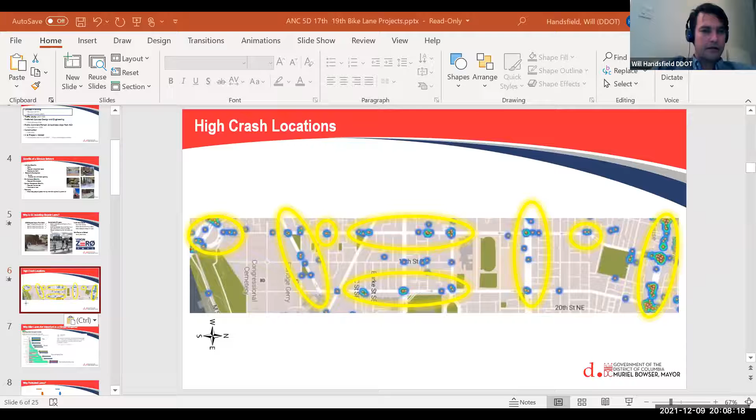Great. Yeah. And so many of you, I think I've crossed paths with some of you in the past, and I'm glad to see you all here. Give me a heads up if you want me to jump into my presentation. Sure. I think we should probably get started. I know a couple folks are running late, so I'll just let them in whenever they log on. And I'm trying to stay off video as much as possible because my connection's a little tentative right now. But yeah, whenever you're ready. Okay, I'll go ahead and share my screen. I probably won't be on the right starting slide, but we'll get back there in a hurry. Let's make it bigger. I think that's right.

And so, hi, I'm Will Handsfield. For those of you who don't know me, I'm a bike planner at DDOT, transportation planner more broadly, but bicycle program specialist. So through that, I'm one of two people chiefly responsible for putting together a connected, protected network of on-street bicycle facilities suitable for use by everyone, all ages and abilities, from pretty much 8 years old to 80 years old. That's really the big mission.

We're going to be talking about 17th and 19th, which are projects that are south of your SMDs or your full ANC, but obviously related. And I'll talk about another project that's in your SMD that's very directly related. I am not going to be the driver on that project, but my colleagues at Transportation Engineering and Signal Design are going to be doing it.

So we're looking at 17th and 19th, which are both corridors that have kind of the weakest form of bike infrastructure for most of it, the sharrow, the way they were used on those corridors. Very recently they were part of a capital project at DDOT. It really finished the planning phase in 2015. They were implemented in 2016 and 2017. And the promise to tame traffic has not been realized, let's put it mildly.

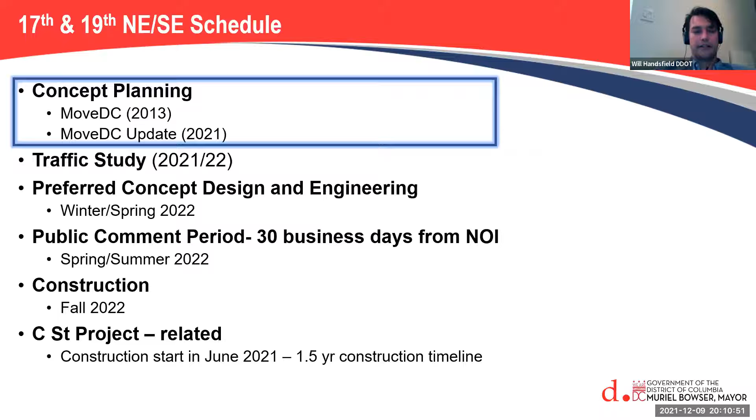We're trying to get to a construction date in fall 2022 so that we can have it done within about a year from now. And then, just related, the C Street project, C Street Northeast, is under construction now. It should also deliver about June 2022. In 2020, I have a little typo there.

So anyways, the bikeway network we're trying to do, there's a lot of benefits. I think this crowd is well aware of them, but let me just call out a few that may not be so obvious. Certainly for economic development, what I don't have on the slide, and probably should, is that local retail sales seem to actually be better in places that are bike and foot traffic accessible. There's certainly the CO2 emissions. One that's come up recently that's very interesting is resiliency.

My own story about how bikes are resilient is in the 2011 earthquake, when my very pregnant wife was in Foggy Bottom at work when they were evacuated from their building. Didn't go back inside. The metro started operating at like half speed, and then pretty soon the platforms were so crowded you couldn't even get down. The street network failed, and so all the lanes for every road were filled with cars, and none of them moved. It was complete gridlock.

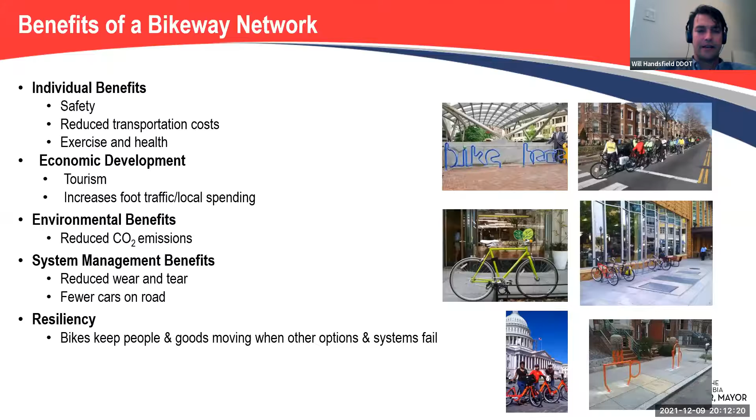And the way I got her out of downtown is I rode a Capital Bikeshare over, sat her on the bike share, and then walked home. It was about 7 miles, but she was able to roll. She was 8.5 months pregnant, and so was not really in a position to walk 7.5 miles. So that's an example, but for evacuations and other things, bike routes and bike lanes and trails especially are extremely good. Which I always like. I think that's sort of not too obvious to most.

We start with our 2005 bicycle master plan. We actually achieved all the goals in there. We got to, which is actually the hardest thing in my lifetime to change about the transportation network, something called mode share, which is what mode people are choosing. When I first started being interested in transportation planning in like 2003, 2004, I was in LA. And like nobody walks in LA. True, pretty much, right? And if you do, you're kind of treated like an alien species. But that's around what we had in LA at the same time. 1% of trips by bike, maybe generously.

Same in DC. DC has invested a great deal in bike infrastructure, and so by 2015, we actually had 5% of trips by bike, and now we're probably at like 7 or 8%. And there's some neighborhoods, so Capitol Hill and close-in ones like Trinidad are good examples. They're really high. They're like at 10%, 12%, 15%. Adams Morgan, Shaw.

We also have a bunch of goals from Sustainable DC. One that's really interesting is that 25% of all commuter trips should be walking and biking trips in the next 10 years. And we should actually reduce automobile trips. This is in writing, by the way. I didn't make this up. Reduce automobile trips from 43%, which is around what it is today, to 25% of all trips.

We also have the Vision Zero goals that say zero fatalities, right? No fatalities acceptable. We're going to do everything we can to get to zero. And then we have Safe Routes to School, which is the simple premise that children should be able to go on their own to school or with a parent and arrive safely.

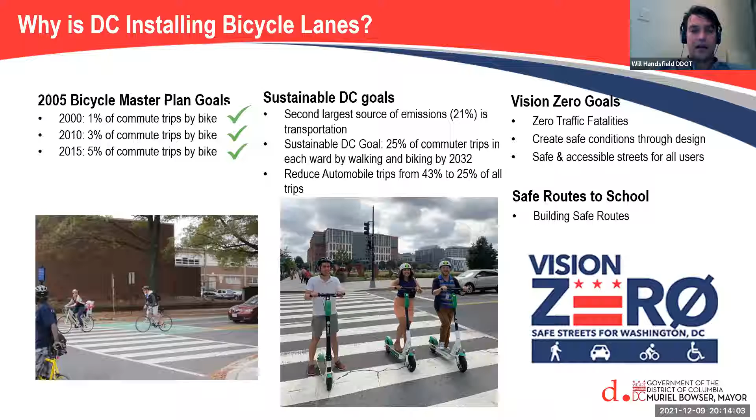I just want to show all the crashes in the 2 corridors we're talking about. So 19th. And just orientation-wise, north is to the right in this diagram. I have a legend there at the bottom, but just to fit it all in, we had to turn it sideways. So the right side is going to be Benning Road, and at the very bottom, you can see Barney Circle. And you just see these clusters of crashes.

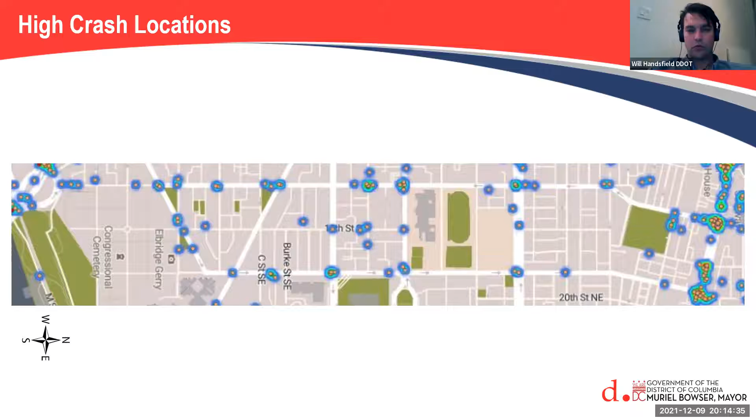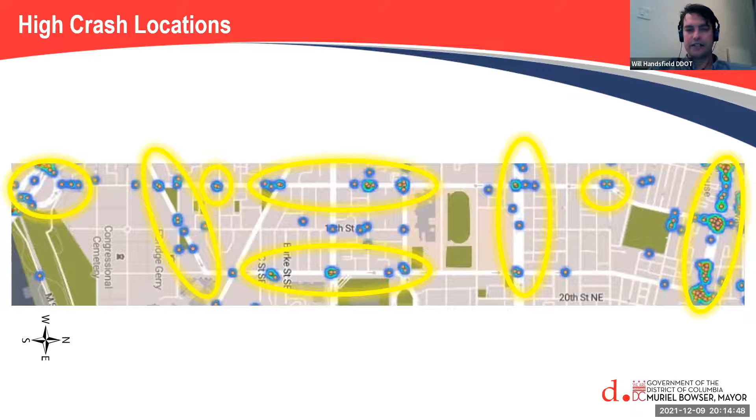That's a lot, right? And the reason that there are so many crashes is the road design. It's 2 lanes in each direction, one way. That pattern just generally is set up to have a lot of crashes. You can also see there's a huge cluster along Benning Road. So that's an area of future focus. It is one of the more principal arterials in the city.

Lots going on there. Bike lanes are an important climate response for anyone who's concerned with the issues of climate change. Down at the bottom of the chart, that's the CO2 impact of internal combustion cars. Just slightly above it is electric cars.

You can see it's a lot more in the manufacture and less in the operations, but it's not all that great, all told. Transit is excellent. It's down there towards the bottom of the chart, but at the very bottom is walking, and next to that is biking. Slightly above that is e-bike. You also have light rail, right? Electrified light rail, like the streetcar.

I think it's important to get this out there that what is scientifically necessary to do right now exceeds what is politically possible. And I'm trying to change that, along with many people at DDOT, so that we can put in the projects that will actually help us get to a low carbon future. And I'm under no illusion that just doing it in DC is enough, right? But DC is a leadership city, right?

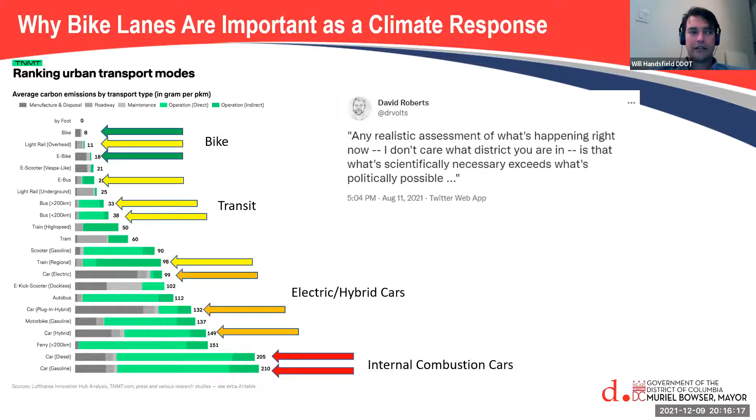We get millions and millions of visitors annually. And unlike European cities that we sometimes can point to, if they see it here, they go, well, DC did it, and maybe we can. And so we are leading the country. We're one of probably the top 3 to 5 cities always on any ranking of bicycle friendliness and bicycle accommodation, though I don't think we do enough, and I'd like to do it faster.

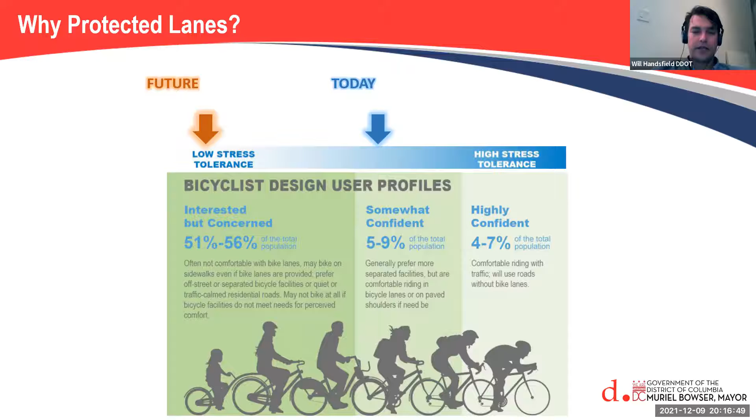Here's kind of where we are today. We used to be catering just to the person on the right, the fast, I'll ride in traffic type cyclists. I think we're pretty good generally for people who are more commuter oriented, but what we really want to plan for is that user group on the left. It's like mother and child, or somebody who's older, that if we plan around their stress tolerance and their needs, then we really cover everybody in our bicycle network. So that's really the design customer.

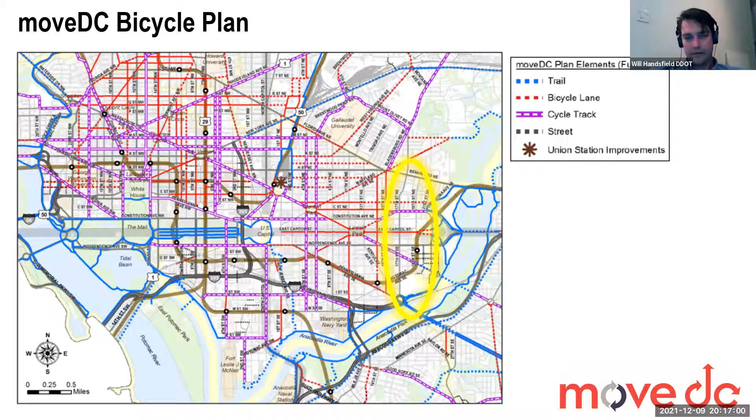Here's the 2 corridors. In the original Move DC from 2013 they weren't considered as very important, but we have a new version and both of those corridors are on it. And so we're going to be working to try to make them work. But also for 5D, you can see some of the other routes that we've got on there. So we have Maryland Avenue going all the way diagonal up to meet with M Street going east-west. We have Bladensburg, and we have 17th Street, and then 17th Street hooks around and becomes Mount Olivet. So all those corridors are envisioned as having some bike facilities on them.

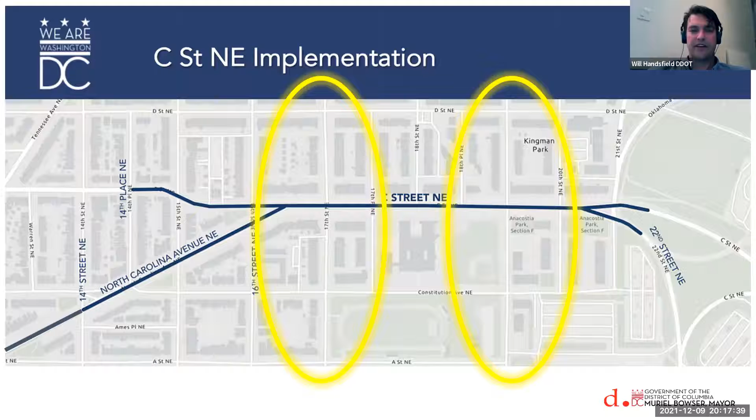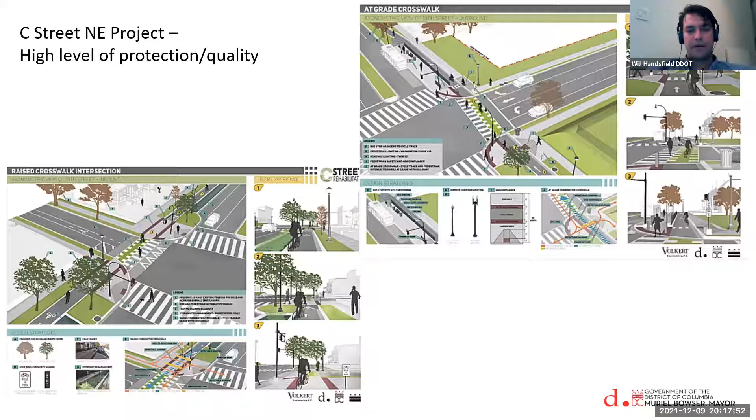There's a bunch of types we can talk about. Just for C Street, this is maybe not so relevant for 5D, but this is the intersecting street. And it has this really top level, best in class type infrastructure that they're adding to the corridor, right? So raised crossings all over the place, separated bike paths, a real game changer in terms of what we're actually building.

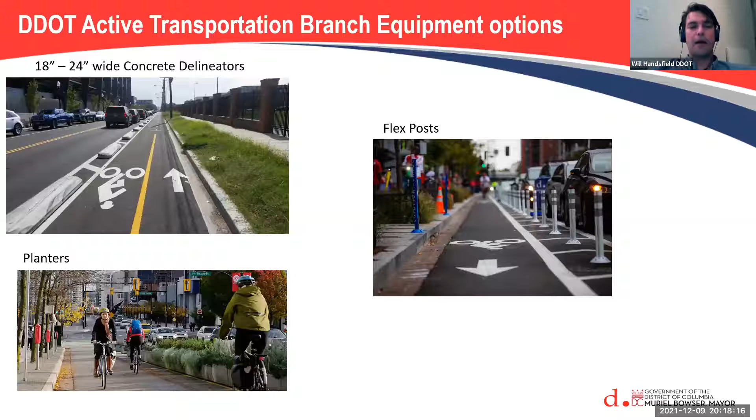This is the kind of stuff that I tend to work on, right? So within the existing curb to curb, we will use paint, really it's thermoplastic, but anyways, colored pavement markings and equipment to change how the road operates and who gets to use it safely.

There are a bunch of reasons why we're trying to change this particular corridor. A lot of the general thrust is we really need to get this network of bikeways in place so that we can meet that 2032 goal of replacing a lot of driving trips with bicycling trips. It's not going to happen if we don't provide safe places for people to ride their bikes. We get a lot of, actually it's not TSA, I think it's TSIs now, TSIs for the 17th and 19th corridors, a couple particular intersections where those high crash rates are.

There's an overall interest in diminishing the existing traffic dangers along those 2 corridors that result from that minor arterial condition. There are some new uses like the RFK fields that are proximate. There's the 2 schools, Eliot-Hine and Eastern, and I'm sure there's some students from your SMD that go there, and we would like to support them if they want to bicycle there by themselves.

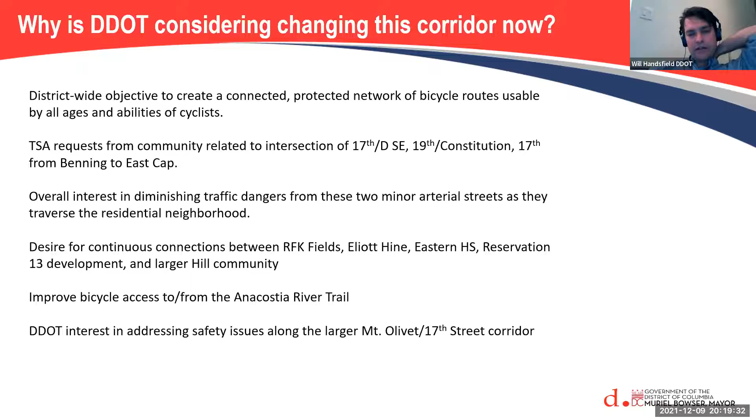There's also an important bike trail link to the Anacostia River Trail at Barney Circle, and our overall interest in addressing some of the safety issues along Mount Olivet and 17th, which will come later. But this is the overall corridor we're going to be looking at. I've tried to divide what we're talking about, and I will make a slight change. The buffered bike lane section of 19th that we outlined here, when we presented to ANC 6A and 6B, they really asked us to apply ourselves and try to come up with a more protected version than just a buffered bike lane.

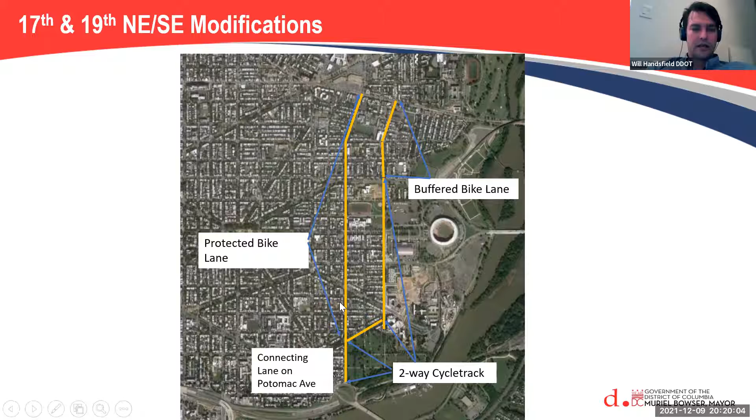But mostly we're doing protected bike lanes throughout the corridor, or we're doing some sections of 2-way cycle track. So it's going to be a mix. I've done some cross sections just to show you what that looks like. So here we've got from Benning Road to East Capitol.

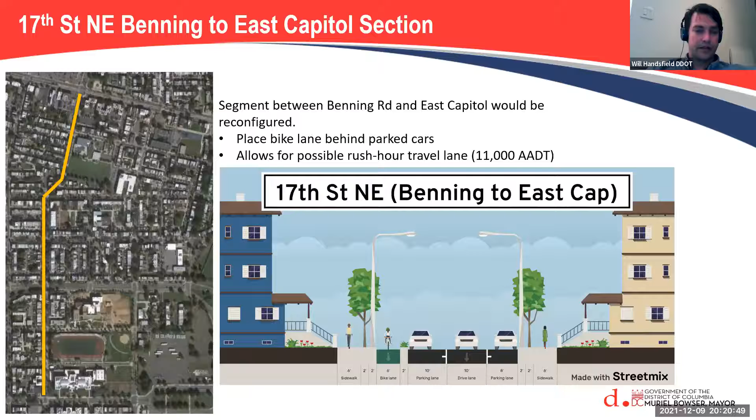Right now, this is that 2-lane section with sharrows. And what we would do is instead convert it to be a protected bike lane that's behind parked cars and one travel lane. Now, the parking lane could be set up so that it could at times become a rush hour lane or something. I think what we heard from the ANC 6A and 6B is they do not want that to happen. They do not want a rush hour lane. They would prefer to have full-time parking, and I think that's probably the direction we will likely go.

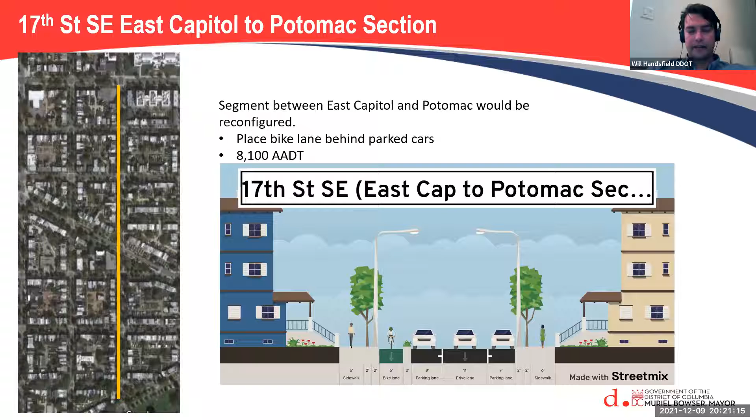Right now, 17th from East Capitol to Potomac Street is set up as sort of a regular bike lane. There's a lot of misbehavior by cars that use that as kind of a passing lane, or they do other aggressive things. So what we'll do is change that to set it up in this way, where you have a single southbound 11-foot drive lane. The bike lane will be behind cars, so that it's very well protected.

And then we get down to the section along the Congressional Cemetery. This is a good opportunity to actually change the pattern. This is that trail connection, right? At the very southern end is where you can connect to the Anacostia River Trail. So we'll try to do a crossover right before this, to get bikes from the west side to the east side of the road for southbound, and we'll have a 2-way cycle track there, so people can go both ways coming to and from the trail.

I'm going to jump ahead a little bit too. Because we have that 2-way cycle track on 17th, we thought it was a reasonable idea to continue it onto Potomac Avenue on this side of the cemetery. A very surprising number of crashes happen here. It is one of those areas that goes from a 2-way street to a 1-way street, and the 1-way portion starting at 18th and going to 19th has 2 lanes, which is just generally a dangerous pattern. So we'll do something like this.

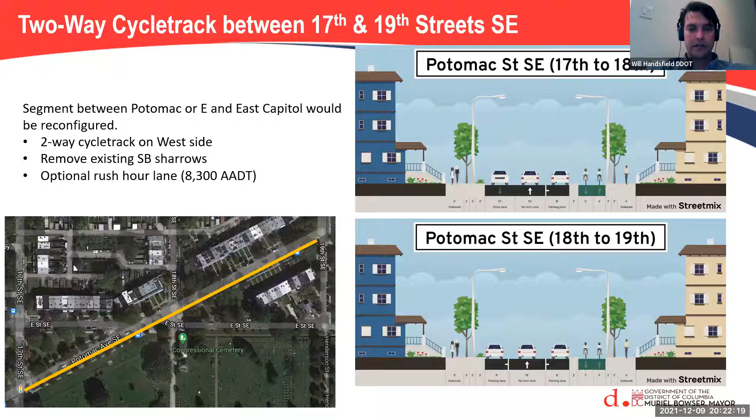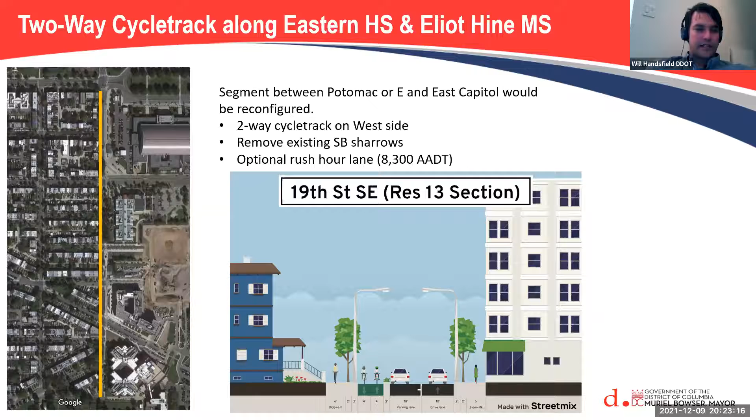And then let me go in reverse order. So then we'll come up, direction of travel from 19th Street. So now we're going to go from essentially Potomac north to East Capitol. Again, we would seek to do this as a 2-way cycle track over in this part for a couple of reasons. One, this is sort of an edge street, right? Beyond here is mostly institutional uses. We have a new neighborhood essentially being developed with Reservation 13. Their phase 1 is built out now, and I think is on its way to full occupancy. They're building stuff behind that. We'll also connect to the trail. But when there's new neighborhoods being built, we want to really do everything we can to encourage the new residents to choose bicycling as their first choice, or transit and walking. All those mix of uses. So doing it with a 2-way cycle track would be very supportive of that.

The next 3 blocks, really from East Capitol to C Street, we have 2 large school campuses, Eastern High School and Eliot-Hine. Right now we have a couple of dangerous crossings, like at Constitution, probably the worst one because it's a multi-lane unsignalized crossing. They just put in a new rapid flashing beacon, which will help to some degree, but that's just a crossing that we should not have anywhere in the city, because they're likely to result in crashes when you have multiple lanes with an unmarked or uncontrolled pedestrian crossing.

So this will continue that same 2-way cycle track pattern past the schools. That should assist a lot more children getting to the schools by bike. This will intersect with that big C Street project, and also help form this network, and that network will help kids go to RFK Fields for soccer practices and football practice and things like that. We really want to support that level of independence and bicycling.

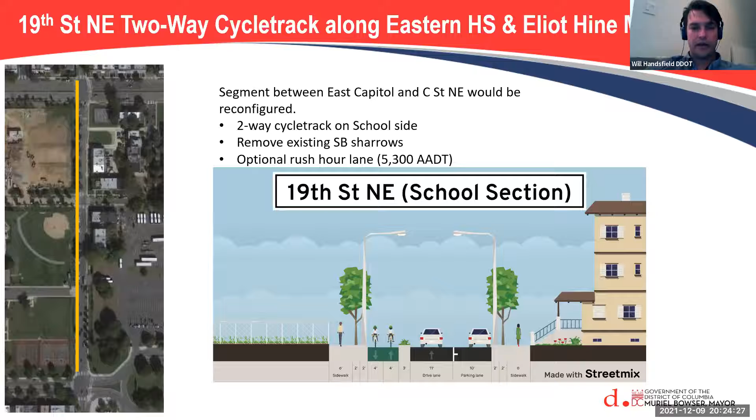And this is that part that I think we are going to rework. I don't yet have a final version, so I'll show you the slide I had before. But I think we can swap some of the parking around and get the bike lane protected.

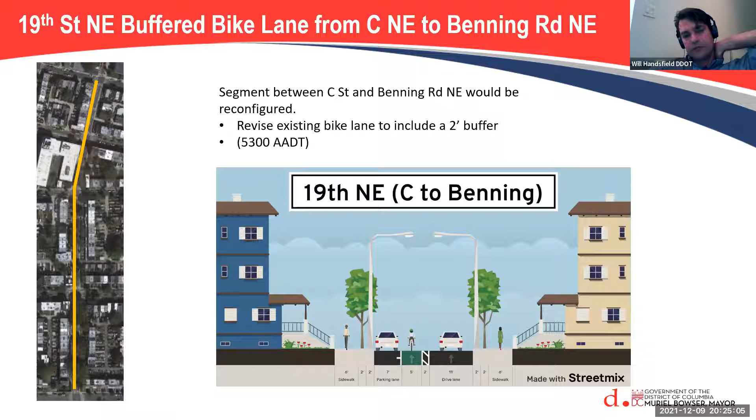It might be a little narrower. This is a much narrower cross section of street. I think when you add it up, it's like a 25-foot wide cross section, which is pretty skinny. So we'll do some jujitsu and try to fit that in. It also has a much lower traffic volume all told. And I think that covers the overall cross sections.

And so what the big picture is, and I'll tell you the trade-offs, right? So again, it's south of you guys, but when we do these protected bike lanes, at the intersections, particularly in any alley entrances, we need to create parking setbacks so that you can't park so close to the driveways or alleys or any other cross street. And that's so you can see the bicycles coming and they can see you.

We also do setbacks with any new project for pedestrian crossings. So anytime we do work and refresh crosswalks and things, we often will put in a 25 or 40 foot setback from the intersection. And it's so people can see pedestrians as they start crossing and vice versa, so the pedestrian can see any vehicles coming towards them. It's one of our main safety interventions.

So there is a parking trade-off when you do protected bike lanes versus the traditional bike lanes. We're also trading off capacity, right? Rush hour lanes, obviously more cars can fit through that pipe. When we talked to ANC 6A and B, they basically said, well, yeah, that's the problem. We do not want to be the corridor that all these cars come from.